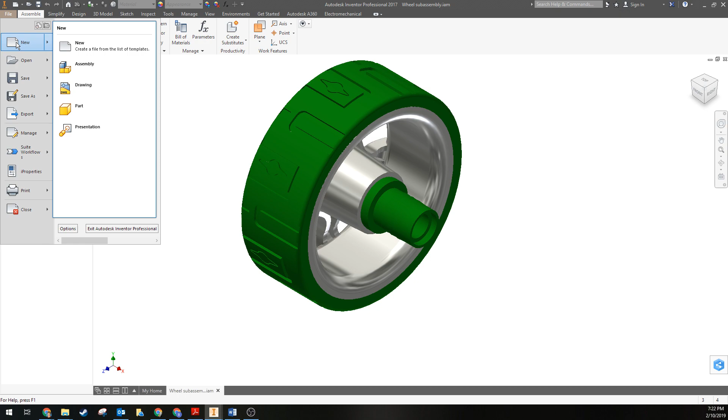Once your wheel subassembly is completed, you are going to start a new assembly, which is actually going to be another subassembly with a subassembly in it, but we'll worry about that later. How about we start with putting in the front, and I'm going to hold control again, the 2-block socket, and how about one of these wheel subassemblies?

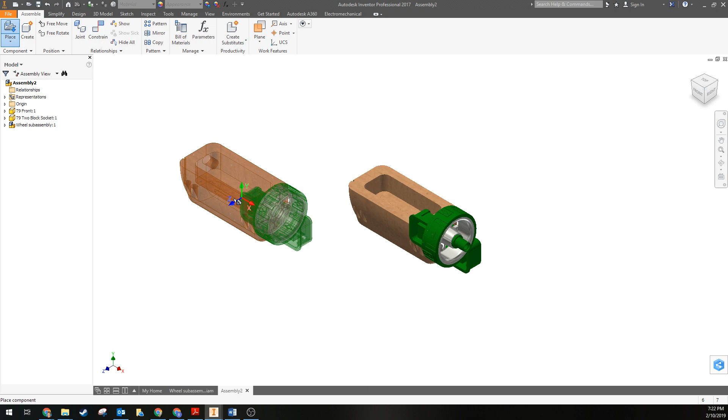We'll hit enter and throw those in. For this one we want to hit escape so it doesn't put in more. I'm going to ground the front here just so that I make sure everything is properly constrained to it. Go ahead and hit grounded, and we know it's grounded because this little thumbtack shows up over in the browser area here.

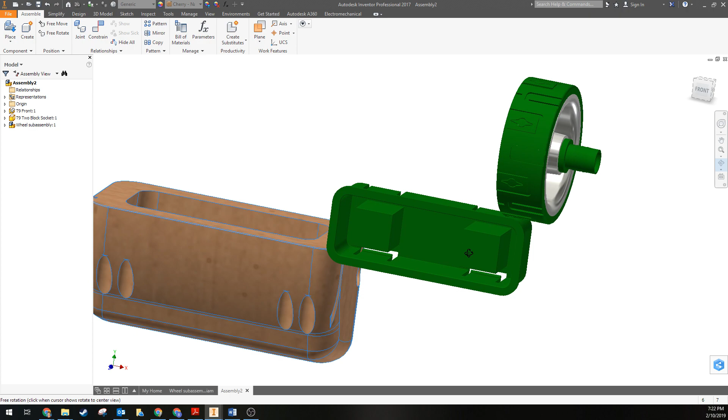Alright, let's see what we can do with this. So let's move around a little bit and see what we've got. We have a wheel subassembly, we have this socket thing, and we have the front. Let's start by putting the socket thing into the front area here.

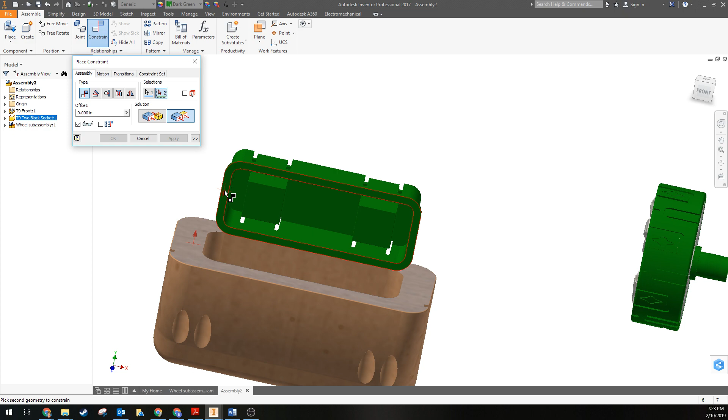So the trick with this is that you need to have this surface flush with this one. I'll show you how that works. Flush constraint, this surface flush with this one, hit apply, and let's see what you've done. So if you go and look at it from the side here, you can see that that's flush.

Problem is, if you go and take the bottom of this and put it all the way into the bottom of the opening, it goes in too deep. All right, so the opening is a little deeper than the socket.

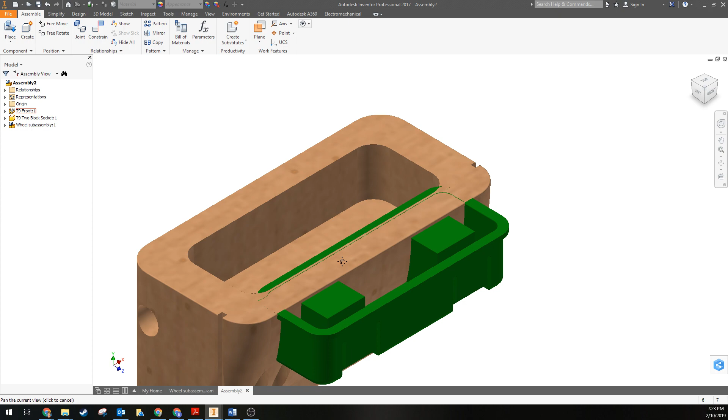All right, once that's done, we are going to just constrain the sides. So a mate constraint with this side, and you probably, well, let's move it around to make sure we get in the right surface. So this side here.

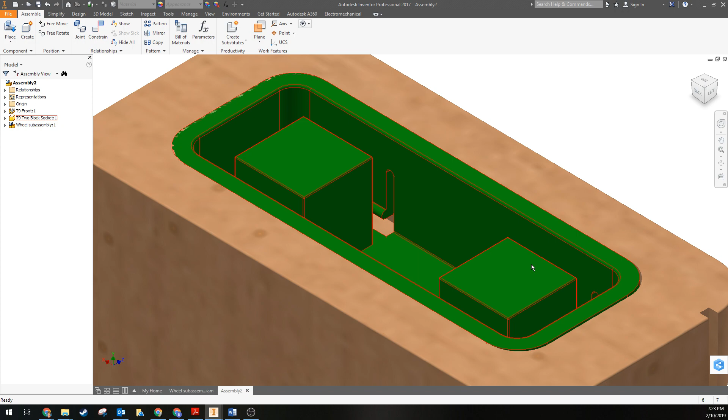All right, we'll hit apply, and then let's just move this a little bit so we can see what we're doing, so you can see what's constrained and what's not. One more constraint here between this surface, and then we'll click around here and this surface, and we hit apply.

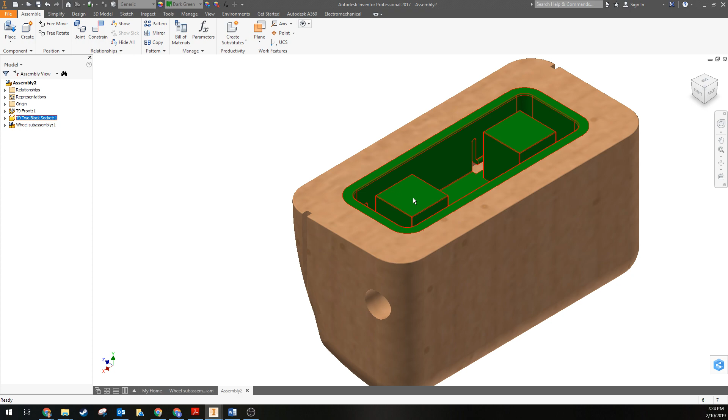All right, if we try the wiggle test where we grab this and try wiggling it, we'll notice that that is fully constrained. Let's put those wheels on. Let's put that wheel subassembly on.

So it just happens to be oriented very nicely here so that I can see the different components that I need to grab. I'll go to my constraint, my insert constraint, and we will align the center of all the parts of the wheel assembly here with the center of the hole that it goes into.

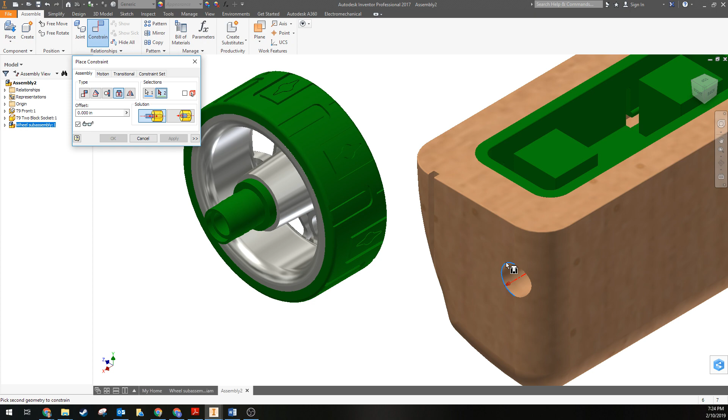All right, and then we just need to focus on the edges. So this edge here, and it doesn't matter which one you choose first and second, needs to be constrained to this edge right here. So you see where that yellow circle is? Those two need to be constrained.

And once again, you have two solutions. So if you do a constraint like this and it shows up all weird, just try the other solution, and often that'll fix your problem. We hit apply, and not too shabby.

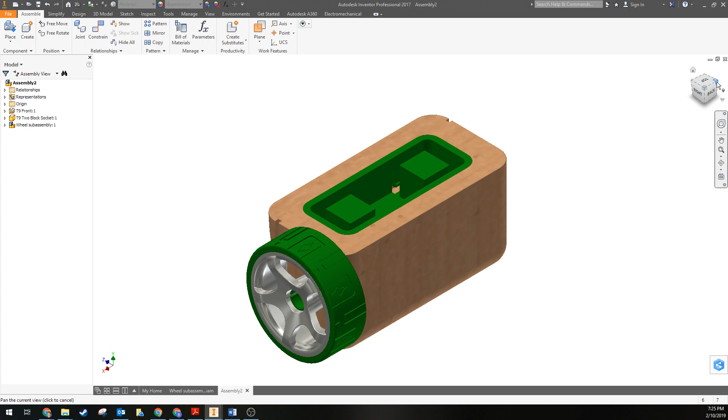What we need to do though is we actually need to throw in one more wheel. So let's go back to place, wheel subassembly, open, and throw that one in, and then we'll do the same set of constraints there. So I want another insert constraint with this opening here, and let's flip around so that I can see the other side.

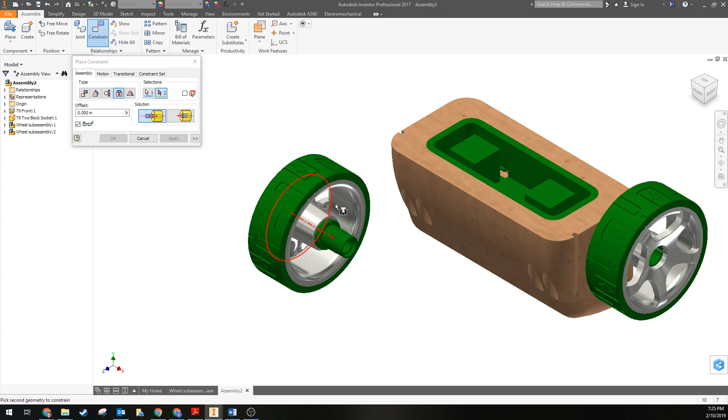This one right there. Hit apply, and you can take a look at your work, and it should all be beautiful. What I'm going to do is I'm going to save that as front subassembly.

All right, there we go.